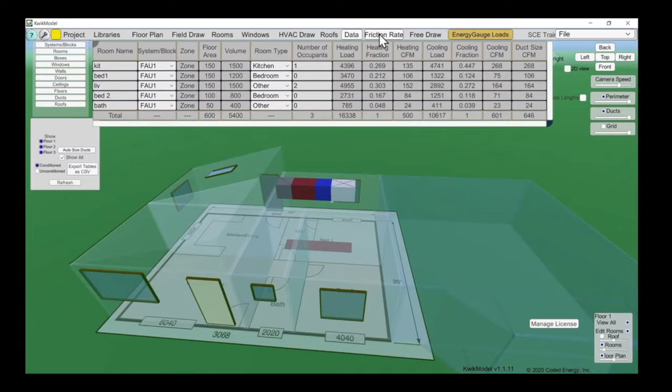All right, so in the step-by-step instructions, we're on step K, duct draw mode, and that's actually changed. That's now HVAC draw. I need to update those. So it's HVAC draw, and it says place at least one register in every room, and then place one return grill, and then draw the ducts, okay?

So we've already placed our furnace because we needed to do that in order to tell the software how many systems we have. So we've already got our furnace there, our air handler. So I'm going to scoot that over. Let's get it tucked up next to the attic access. I'm just looking straight down from above here. So here's our attic access. Let's say our,

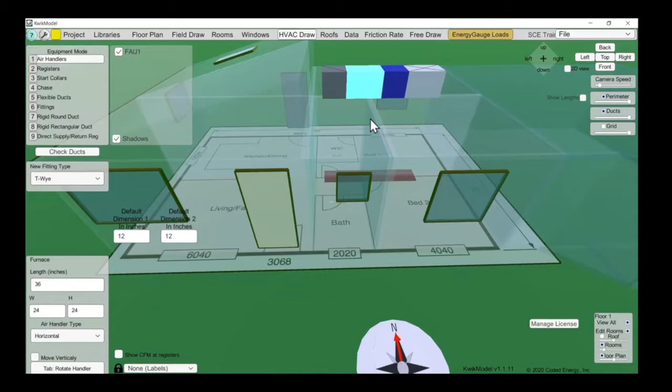I just noticed something. I drew these vaulted ceilings in here, just because I wanted to show them to you, and I left them in there, so now I got to deal with them. In the earlier example, I didn't have those, so I need to change something. So when your vaulted ceiling goes like this, your trusses are probably running left to right in this house. The roof trusses probably go up and then come down here. And so the space where I have to put this furnace probably runs front to back. So I need to rotate my furnace.

There we go. And I'm going to put it right here. This is way bigger than what the furnace would really be, but it's easier for you guys to see. Okay. So I'm going to rotate the furnace. You have to consider what kind of space you have up in the roof, where your attic access is. So there'll be a little access platform here. So the service tech can climb up the attic access, sit on this platform, and service the furnace. So the service side of the furnace will be facing this direction.

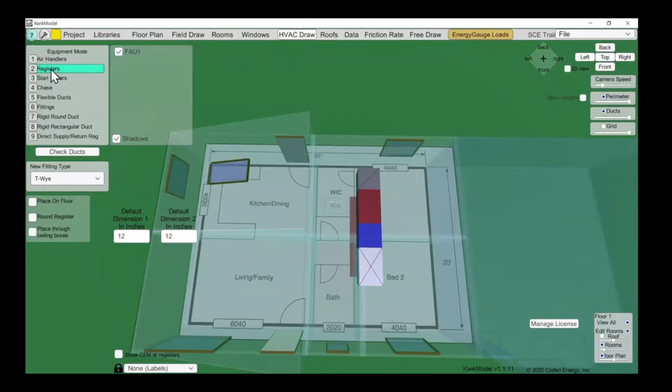We have this free draw thing here where you can draw shapes and stuff. So you could actually draw your furnace platform there if you wanted to. All right, but I got to put some registers in here. So click registers up here in equipment mode. And then similar to Windows, you just hold down the Alt key and then click where you want the register to go. By default, it will put in ceiling registers. If you want to put in floor registers, there's a button over here that says place on floor, okay?

And you can actually go underneath the house like this, flip the house and look at the house from underneath, and you place registers from underneath if you want to. So you can do floor registers or you can do ceiling registers. By default, it does ceiling registers. We'll look straight down from above. So there's a ceiling register. You can change those sizes. It defaults to 12 by 6 by 4 inches tall. Okay, you can change it down here.

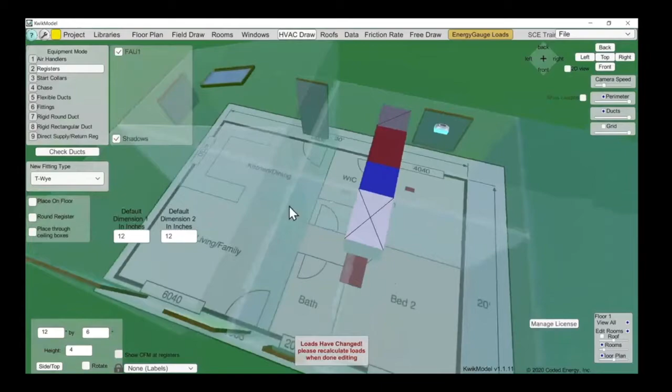And you can also do sidewall registers by just clicking on a wall. So in this vaulted ceiling, instead of putting registers in the ceiling, I'm going to put high sidewall registers in these knee walls. And I just hit Alt, click, and click. Okay. So see those registers are in the wall there. That's going to serve the kitchen and the living room. I put one in bed 1. I need to put one in bed 2. And I need to put one in the bathroom.

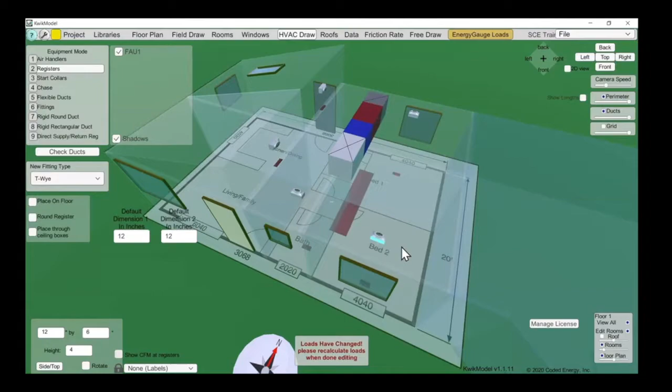Okay. Now, I have an article about register locations. It's kind of funny. One of the most contentious topics I've ever gotten into related to HVAC design was where in a room you should put a register. Some people will insist that the register needs to go over the window. And some people will insist that the register should go back inside the room, blowing across the room towards the window, okay? They all have advantages and disadvantages. Whichever one you do, you have to do it correctly. And by correctly, I mean you have to use the right kind of register, okay?

Generally speaking, interior to the room, blowing across the room is usually more energy efficient because it's gonna have shorter ducts, okay? The other thing that's very important, and I talk about this in the article on my blog and also in the book HVAC 1.0, is mixing. You want to make sure the room has good mixing.

My general rule of thumb for good mixing is to blow the air the opposite direction that it's going to go naturally. And by naturally, it means the air is going to want to go back to the return. So blow the air the opposite direction. So we've got this room with a door over here. And as the air comes in, it's going to want to go out the door to get back to the return. So blow it the opposite direction.

So being interior to the room, blowing across the room will encourage better mixing. The air will come across, it'll lose velocity, it'll settle, it'll mix, and then it'll be drawn out or pushed out the door, okay?

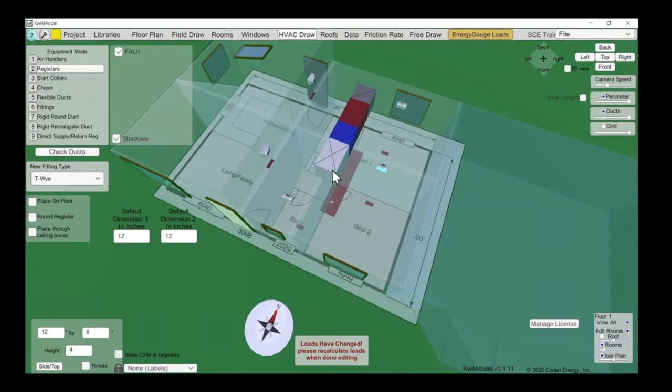As opposed to, if you were to put the register here and make this a two-way register, half of that air is going to go straight out the door, half the air is going to go to this side of the room, go around, and then come back out, and then you'll get a big stagnant area over here by the window. All right, so keep that kind of stuff in mind.

Again, this is more of an advanced topic, so just to keep things simple and keep them out of the way, I'm going to go against my own advice. I'm going to put them sort of out this way. By the way, in Las Vegas, they insist, or at least back when I was doing design, that the register be a square, four-way register centered on the room. That's how they do it in Las Vegas, or at least back in the day.

Okay, so I've got these high sidewall registers. I've got all the registers everywhere I need to go. 1, 2, 3, 4, 5. There's 5 rooms. Okay, the next thing to do is I need a return grill. So I'm going to put it in this little hallway here. So I'm just going to place a register. It's like a normal sidewall register.

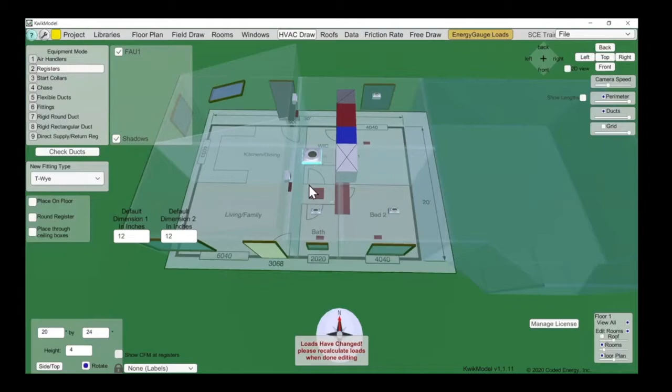And you can see the shadow is going to line up in the hallway there. I'm going to change the size just so that it looks like a return. Okay, give it a nice, good size. I'm going to rotate it there. So that's going to be a return. The whole thing about sizing registers and sizing grills, that's Manual T for terminal selection. Let's see. All right, so that looks pretty good.

Now I'm going to connect the supply registers to the supply side and the return registers to the return side. That's how the software knows the difference between a supply and return register or grill, is which side of the furnace or air handler it's attached to, okay?

So to attach a duct to a box, a plenum, we're going to use something called a start collar. They might be called something else in other parts of the state. But basically you cut a hole in the box and you attach a collar and you attach duct to it. We're gonna do a flex duct design, okay? You can do sheet metal, you can do rectangular. I have a whole video on our YouTube channel about how to do that, but I'm gonna keep it simple here.

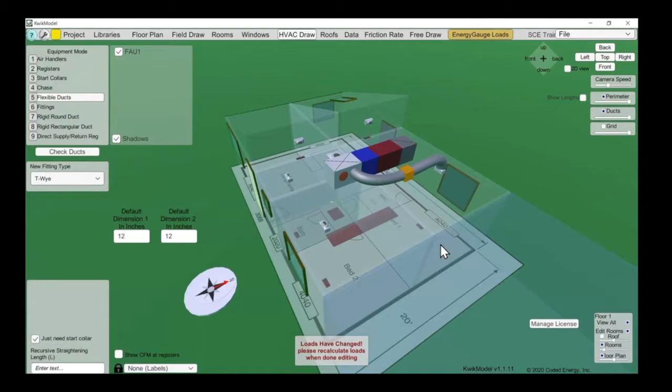And let's see, I'm gonna go to flex duct and you just highlight the start collar, highlight the register that you want it to go to, and you hit enter. And it draws a duct. Okay, we'll do that here. I need a couple start collars, so let's go back to start collars. Pull in there, flex duct, there, enter, there, enter. Okay, I've got all but one of them.

So I got this little bathroom here. And the question is, should I just run it straight off of here? Avoid the end of the plenum. Avoid attaching ducts out here on the end, because if you think about it, the air is screaming through this box into this other box, and all that air is kind of crashing into the end of this box. So the pressure hitting the end of this box is very high.

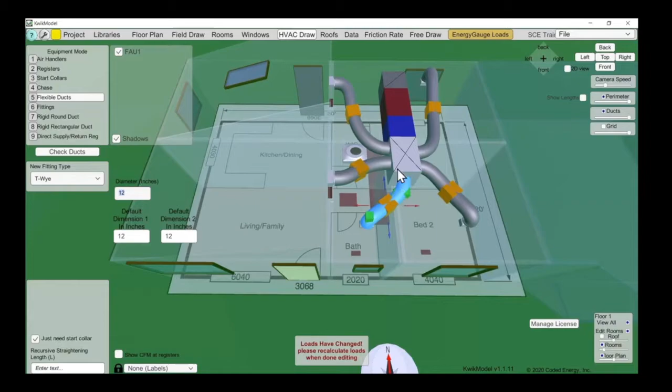So if you were to attach a duct to the end like this, that duct is going to get a lot more airflow than ducts coming off the side. So avoid that if you can, okay?

So there's a couple ways to do it. You could just run a little duct off the side here. We know that duct's going to be pretty small. And the ducts that I'm drawing now are just a default size, and you can change the default. At some point, we're going to lay out the ducts, and we're going to hit a button that says auto size duct, and it's going to size all the ducts based on the airflow, okay? But right now, we're just doing kind of a basic layout. These ducts are all bigger than they probably need to be at this point. So we could put a little start collar down here and we can attach the duct.

Dove is saying if you can show me how to put a T-Wye on a start collar if you have the time. A T-Wye straight off a start collar, or in the middle of a duct? Oh, NCI encourages one. Oh yeah, he says yeah. Okay. One trunk off the top and branches from that on NCI. Yep.

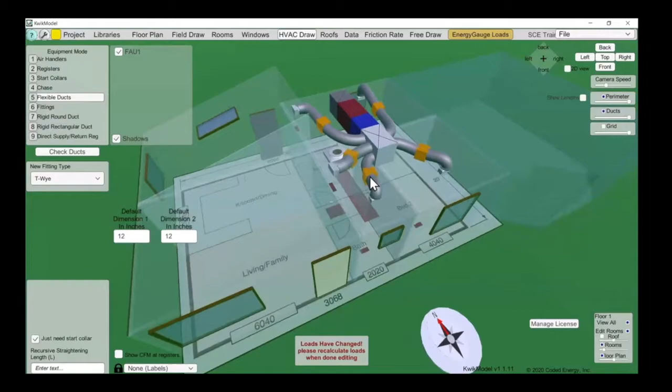Okay, so we could do it like this. But I want to show you a T-Wye. That would be very reasonable. It's a nice short run. That would make plenty of sense to do that. But I just want to show you what a T-Wye looks like. And so what I'm going to do instead is I'm going to branch off of this other duct here and run it over here. And to do that, you have to be in flex duct.

You highlight this handle here. By the way, you can move everything. See these colored arrows? If you want to move up, grab the up arrow. If you want to move left and right, grab a left and right arrow. These green boxes here change the angle of attack where the duct is coming into something. So if I want it to be sharper, I can bring it down. If I want it to be more gradual, I can bring it up like that. And there's also one hiding back in here. So you can really change the shapes of these ducts like that.

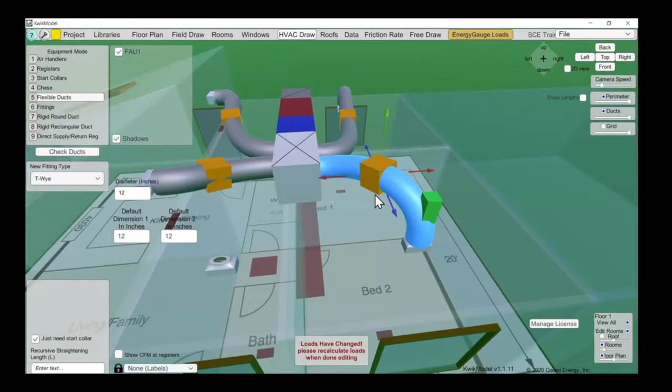All right, so to create a T-Wye, highlight that handle. Whatever's checked over here where it says new fitting type, it defaults to T-Wye. So when you highlight that handle and you hit enter, it's going to turn into whatever it says over here. Okay, so I hit enter, and now it's a little T-Wye. It's kind of big and bulky because that makes it easier to click. So flex duct, I'm going to highlight this connector point here, highlight the register, and hit enter, and there's your flex duct. So that's a little T-Wye right there. These handles go away if you click into a different mode, like Windows or something, so you can kind of look at it. All right, so that's our basic layout.

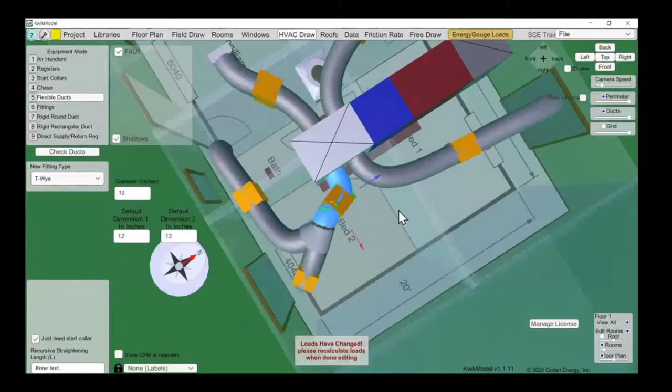There's kind of this little knob in here. We can fix that. I'm just straightening it out a little bit. There we go. That's better. Okay. Now let's do our return. So we got this great big return grill over here, and we need to attach a duct off the back and bring it over to that return. There's a couple ways we can do it. Now remember, we've got this attic access. So the service tech has to come up this attic access and get on top of here, and there's going to be a bunch of stuff in the way. So let's clean that up a little bit.

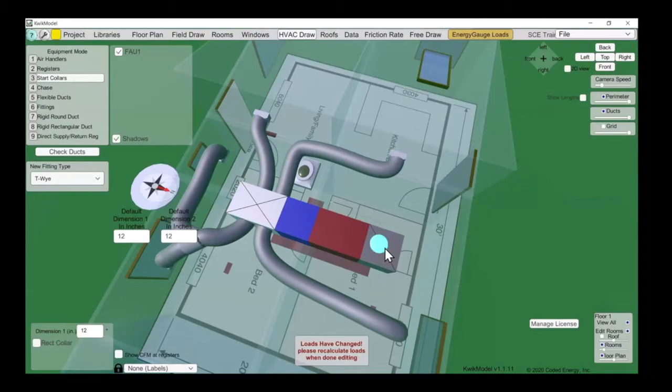So HVAC, draw flex duct. Let's move this duct kind of out of the way a little bit. Give the technician a little bit more room. Now notice this 90-degree elbow in here. We're going to have to account for that in a minute. I'll show you how we do that. And then we also have to get a return to get over here. So we want to keep this area clean for the technician to come in through that attic access. So I'm actually going to attach the return duct to the top of the plenum right there, instead of doing it on the end over here. So I'm going to attach a flex duct from there to there, hit enter, and there's a return.

Now, it's kind of taking the shortest path, and remember, we need to keep that area clean, so I'm going to clean it up a little bit. I'm going to raise this up out of the way, kind of get it up close to the roof. We don't want it to touch the roof. Bring this up, bring it over. Let's run it along the top of the furnace like that. Now we're keeping it out of the way, a little high. Let's bring it down.

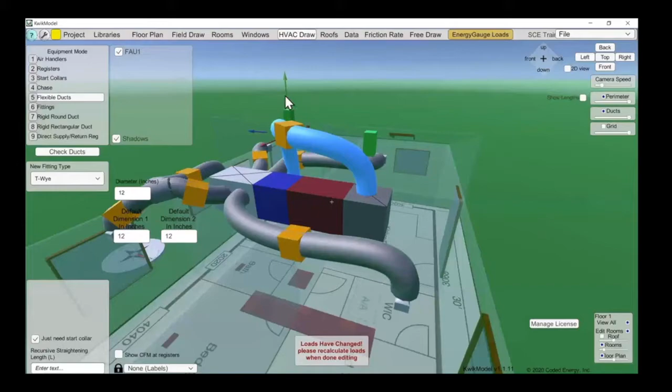It's a roof. Depends on where the peak of the roof is. The peak of the roof is up here coming down. We're going to need to bring this down quite a bit more. Okay. Anyways, you can play with that and kind of get it to look right.

Okay. And let's make that return a little bit bigger. Let's make it a 16. Be a little bit more realistic. Okay. All right. So we've drawn a duct system. Let me turn off the handles so we can look at it a little better.

We've taken a first crack at our duct system. You notice these overlap a little bit. I can clean that up if I want to. Let's go back, HVAC draw, move these out of the way so those two ducts aren't overlapping each other there. Clean it up just a little bit.

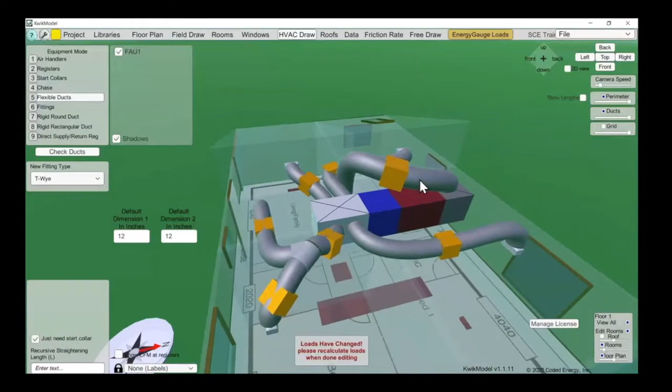And there's a lot of different kinds of fittings you can do and all kinds of other stuff. You can watch some of the videos and it'll go through splices and TYs and tri-Ys and pants-wyes and all different kinds of fittings. Let's show Dob what he wanted to see really quick. Oh yeah, a TY coming straight off. So how do I make a TY come right off of that?

So I go here, I go TY, then I go fittings, or do I just hit enter? No, you go to do a rigid round duct. Oh, that's right. So what you have to imagine, Dob, is that there's a 1-inch round duct attached there. Just make sure the right one's selected and press enter. Yep. And then you can drag it down. And then you just go to fittings. Someone was asking, what did you hit to convert it? Enter. Just enter. There you go.

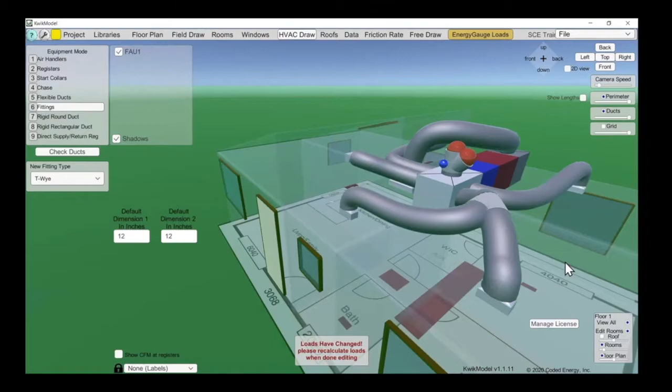So it's rigid round duct, but you're basically making it 1 inch long. And then you go back to flex ducts, and you can attach flex ducts to that TY coming off there. Okay. All right. So we got our basic layout. Now we're going to do friction rate. We'll go through our step-by-step instructions around the friction rate. Okay.

I don't have a good copy of the equivalent length table. Let me show you how easy it is to find stuff online when you need it like this. So I'm just going to go to Chrome, and I'm going to type in the search bar ACCA Manual D equivalent length. Enter. And then go into the images, and there you go. Look at all those. So let's look at this one here. So these are different fittings.

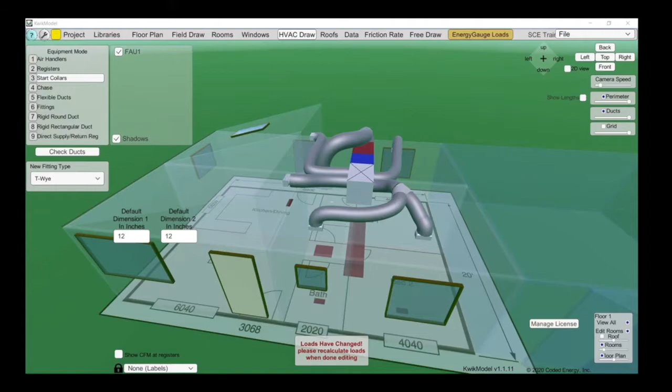How to determine friction rate for residential duct design. HVAC School, hey, that's a good website. It's in the way. HVAC School, by the way, put in a plug for those guys. Someone's saying they can't see it.

Yeah, my bad. And then Robert Rise was asking, why do a home run for the 2 sidewall registers instead of a TY? Because it's a really short run, and a start collar is cheaper than a TY. Plus, if you had a big duct going to a TY, that's another size duct you have to buy. So that might be a 10 going to two 8s. So then you have to buy a 10, you have to buy a TY. It's cheaper to buy 2 start collars and just have the 8-inch ducts come straight off. That comes from experience. And effective length is also part of it.

So if you look in Manual D, there's many pages of these equivalent lengths. What they've done is quantified the pressure drop through different fittings by equating it to a length of duct. So instead of saying this fitting has a static pressure drop of 0.057 inches of water column, they say this fitting is the same as 20 feet of straight duct. So they just equate it to straight duct.

And so if you look at all these interesting fittings, like this weird little side mount boot, this other kind of register boot, these different kinds of grilles, they all have these ELs, equivalent length 60, equivalent length 20. So the resistance to airflow through this fitting right here is essentially the same as the pressure drop of the air traveling 20 feet down a straight duct. That's why they call them equivalent lengths. It's a handy way to make everything speak the same language, and it makes the math a lot easier.

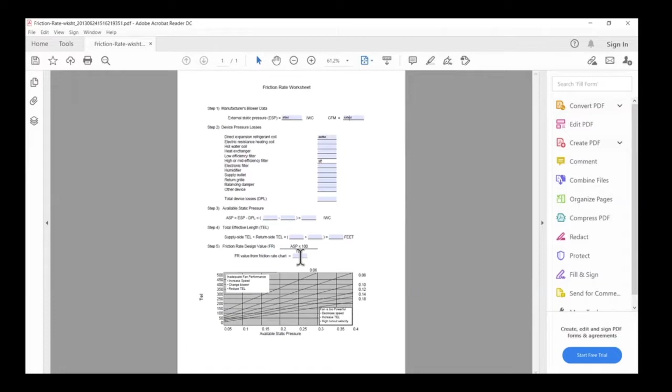And then Manual D, let me zoom in here. Manual D has these recommendations for a maximum and minimum friction rate. The minimum is 0.06, the maximum is 0.18, okay? And if you look right in the middle is 0.1. A lot of people say, oh, that's a rule of thumb or whatever. That's a good starting point. Okay, 0.1 is a good starting point, and sort of a target. If you know you're at 0.1, you're in between the Manual D maximum and minimum. So 0.1 is a good target to shoot for, but it just depends on your actual system.

How long are your ducts? How many fittings do you have? Because all those go into this equation, which is where this comes from.

That was asking, please zoom back a bit, or back in a bit. Zoom in? Yeah, please zoom back in a bit. Like that, or am I going the wrong way? Could you kindly repost the link to the PDF files? Yeah, is that under downloads?

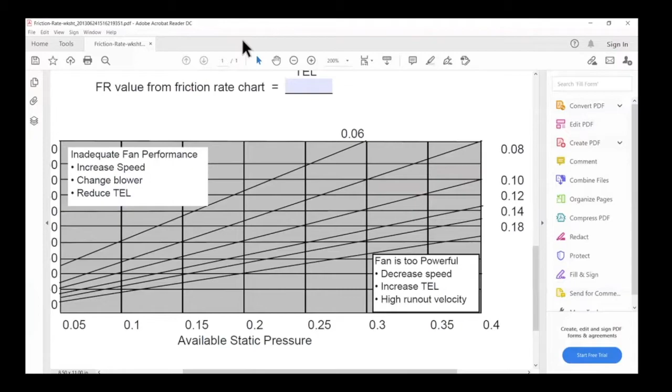This particular one, I just Googled ACCA Manual D friction rate worksheet, and this was one of the first ones that came up. There were tons of them. Okay, but here's the point: you don't need to do this. This is built into the software. This is built into KwikModel. I'm just kind of showing you, so when I start explaining KwikModel, I want you to realize that this is what's going on. Except what's not in KwikModel is this table here.

What about the PDF from last night? Which one? The floor plan? No, you had like a step by step or something like that.

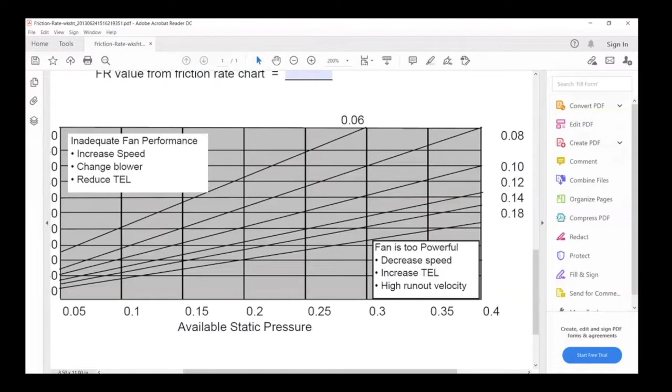Okay, go back. So that friction rate table I just showed you should look familiar, because here is step 1, step 2, and here's our available static pressure. Here's that equation, available static pressure times 100, and here is our friction rate. Now, 0.362 is really high. That's higher than the 0.18 we were shooting for, but we haven't done anything yet. Okay, so we have to put some numbers in here.

So here is our 0.5 and our 601. Remember that from our Manual S? This automatically is pulled from the Manual S, where we entered 601 CFM at a static pressure of 0.5. And that is, let me pull this down here where you can see it. Just kind of show you where that sort of thing comes from.

So here's that imaginary furnace. Here's the 0.5 inches of water column right there on high speed, and here's the CFM. Now this isn't the same furnace, but I'm just showing you where it's coming from. There's our 0.5, and imagine that right there said 601. Okay, it says 1200 for this particular furnace, but that's the numbers that we put into the Manual S.

Those numbers are being pulled back into the tables here, 0.5, 601. Okay, and basically what we're saying is we need to move 601. We have 0.5 external static pressure to work with. We need to size our ducts to ensure that when that furnace turns on, it's not working at a static pressure more than 0.5. Okay.

Open. Yeah, you already got that window open. That's what you just selected. It won't let me open my tray at the bottom. Don't maximize it. Okay. Oh, it's a screen share thing, I think. Yeah. I can't do it on this one because of the way I have it. Just press the Windows key and type in Chrome. Right here.

All right, so I just opened up a Chrome window, and I'm just going to type in Goodman furnace specs. Here's all different kinds of furnaces over here. Like here's one, Goodman brand furnaces. Go to their website. Again, I'm not promoting anybody, just the first thing that came to my mind. So let's go heating. Go furnaces. Actually, going through their website, it's easier to just find it direct.

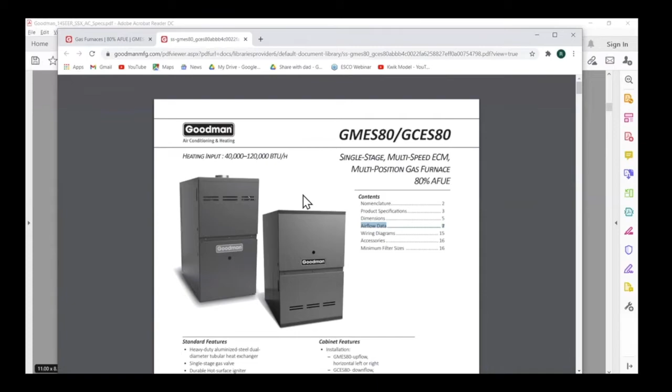There we go. So this is what you're looking for, something like this. It's a PDF file. Notice it's 16 pages, and right there, airflow data. That's what we're looking for. Every manufacturer shows it a little bit differently. One will have certain things down the row and certain things across a column, and another manufacturer will flip those, and another manufacturer will do it differently.

So let's go to page 7. Got all your dimensions and stuff. And CFM and temperature rise versus external static pressure. So here's our static pressure. There's the 0.5. Notice it's usually kind of in the middle. And then here's your different models down the sides. It shows your dip switches for your speed taps, and then here's your CFM. Their smallest furnace is this GMES80 0403A, probably 40,000 BTU.

At half-inch static pressure on high speed, it'll move 441. The next one up will move 458. The next one up will move 474. Oh, sorry, there's a speed tap. I'm doing it backwards. It's going low to high. High is down at the bottom. That's different. I'm used to seeing it the other way around. They don't show the speeds over here, they're showing the speed taps, but it should be obvious if I was paying attention.

High's down here. So 981 on high speed. I thought 441 was kind of low. So this furnace on high speed at a half-inch static pressure will move 981 CFM. At medium high speed, it'll be 759. So it's kind of bizarre they have it backwards like that. It's trying to be different.

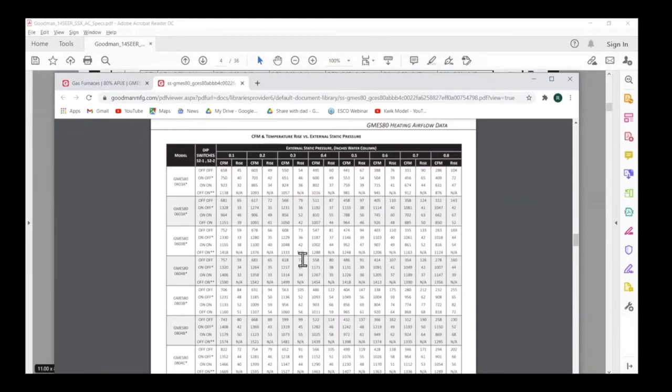I remember back in the day, we used to have a guy come by, and these were all printed hard copy, and they fit in a 3-ring binder. We had one for all of the 5 or 6 major manufacturers. And this thing was a beast. It was like a 6-inch thick 3-ring binder, with pages and pages of stuff. Now it's all online and it's all easy. You guys are so lucky. You're spoiled. All right.

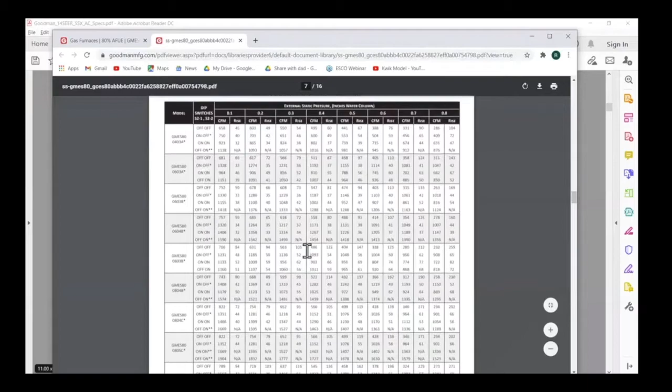So for those of you who stepped down and came back, I was just showing an example of a real furnace spec sheet. And they're so easy to find these days. You just Google them basically. All right, let's go back, open up.

Okay, so here's those two numbers, the external static pressure and our CFM, okay? And now we need to use those two numbers to calculate a friction rate, because a friction rate is how we're gonna size the ducts, okay? Airflow and friction rate and duct type give you duct size, okay?

We're doing flex duct. If you remember in the libraries, there was a duct types. We have vinyl flex, sheet metal, duct board, and duct liner. And this roughness factor affects the size of the duct. Notice that vinyl flex duct has a much higher roughness factor than sheet metal. That difference right there is usually represented in about 1 size difference of duct for round duct.

So in other words, an 8-inch sheet metal duct, in order to get the same amount of airflow, you're going to need a 9-inch vinyl flex, okay, because of this roughness factor. So we default to flex duct. If you're doing a sheet metal design, you're going to want to make sure that when you go to the data tables and your ducts, oh, right here, you're going to make sure you set these to sheet metal. Okay, they default to flex. Okay, I'm getting ahead of myself. So let's go back to friction rate.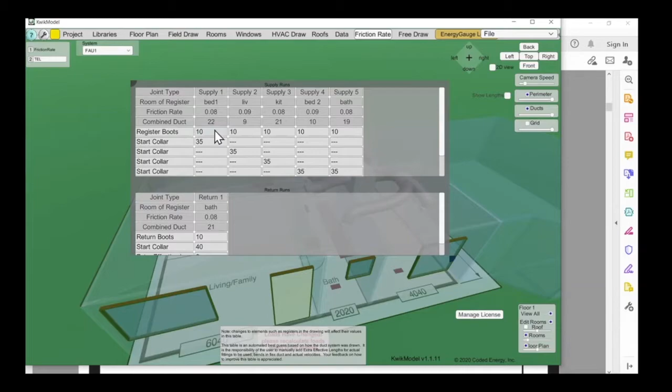And here are our 5 supply runs, and they're going to bedroom 1, living room, kitchen, blah, blah, blah. Okay, so there's our 5 runs, and it's showing the current friction rate for each run, and it's showing the combined actual duct length of each run. Okay, any trunks and branches. We know that everyone has a register boot because of the way we drew that.

Move this out of the way. So every run has a register boot. So that's 10 feet. You can edit these. If you're saying, no, it's a different kind of register boot that actually has 15, you can come in and edit these. This is just a first crack at it. The other thing it has is a start collar.

A round duct attached to a supply plenum like this has an equivalent length of 35 feet for the air having to make that bend. And so there it is, 35 feet. So each one has that. You can edit these, you can add to these. You can stretch it out.

Don't stress over these. These equivalent lengths aren't super accurate to begin with. Even the tables that you're looking at, they were done by University of Texas a long time ago in their lab somewhere. And don't stress over it, okay? Do your best, take some defensible numbers, just be able to say, yeah, I did this because I think this TY is one of these and it does this. Just think about it. Just be due diligence, go through, check it, okay?

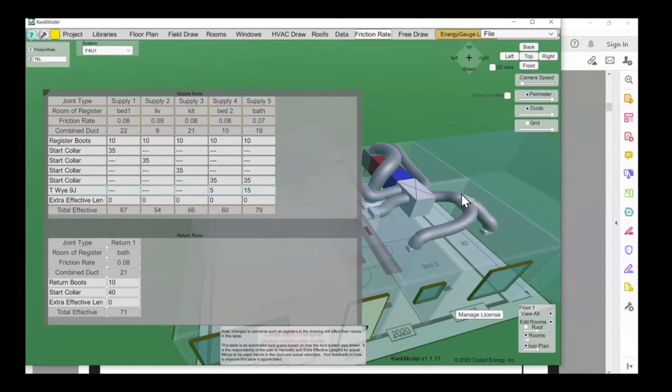And so it will do that automatically unless you tell it otherwise, and the fact that we're using software to do all this math for us makes it easy to do that, okay? So I'm gonna go back to the friction rate table. So the total equivalent length, you can look at each one individually by clicking on each individual run and then the returns. So remember the Manual D was suggesting between 0.06 and 0.18. I said, let's shoot for around 0.1.

I'll go back to this because we can see them all. 0.08, 0.09, 0.08, 0.08, 0.07. So we're okay. We're looking okay. This might change later on, but this looks pretty good. We're in the ballpark. We're not below 0.06. It'll actually give you a little error message if you're below 0.06 or above 0.18. But we're close to 0.1 on some of these. Okay, I think we're okay. This is a good place to sort of work from, and then we'll fine tune it later on.

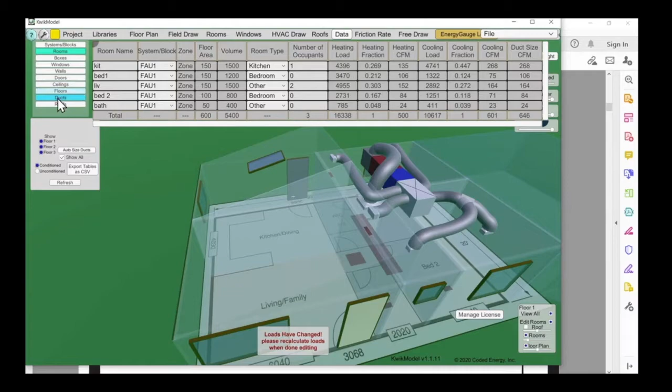All right, so we got our friction rate for each duct. Go back to the data table. Go into our rooms. Here's our airflows, heating airflow, cooling airflows. We've got our totals. They're being distributed accordingly. Now, let's go look at the duct table. In the data tab, the duct table, and here's our run. Let me scoot it down where we can see the whole thing. If you click on this, it will highlight the duct. If you click on the duct, it will highlight it in the table.

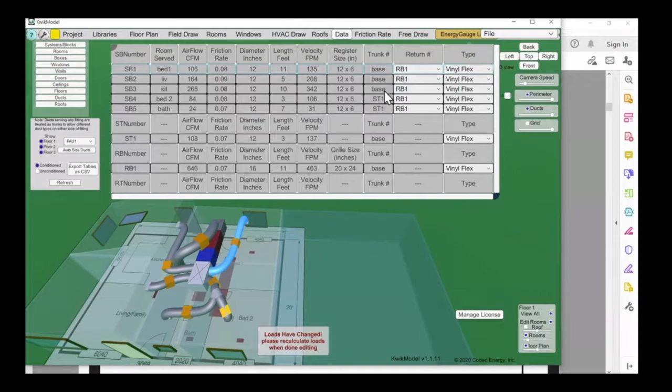All right, so let's look at SB1. Supply branch 1 is serving bed 1. It has a friction rate of 0.08. It's currently a 12-inch diameter duct because that's what the default was when I first drew it. It's 11 feet long. Currently, there's a velocity of 135. The register is 12 by 6. This is just informational. You can change this, but it won't change any of your calculations. And it's attached to the base. It comes straight off. There is no trunk serving it, okay? Let's look at this one, bed 2.

So this little run right here is called Supply Branch 4. It's serving bed 2. It has 84 CFM, friction rate's 0.08. It's only 3 feet long, and it is being served by a trunk called ST1, Supply Trunk 1. What is that? Well, here's this run. A trunk is a duct upstream that serves it. So that's going to be this duct up here.

So you see this ST1. Look over here. Here's our trunks. There's ST1. Highlight it. There it is. So this one is actually serving 2. So if we go back to the table, there's the 2 that it's serving. Okay.

So this trunk, the airflow in this trunk is 108. That should be the sum of these 2 branches that are being served by it. And if we look there, we got 84 plus 24 is 108. So those 2 branches are being served by that trunk, which means you add that airflow, and that's how much air is passing through that trunk.

There's only one return. It's getting all the air. And remember, it's 646. Why is it 646? Because remember, some of the heating CFMs were higher than the cooling CFMs, so we're designing it to 646. That might be a little safe, okay, on the return, but don't stress about it. Don't stress about it, okay?

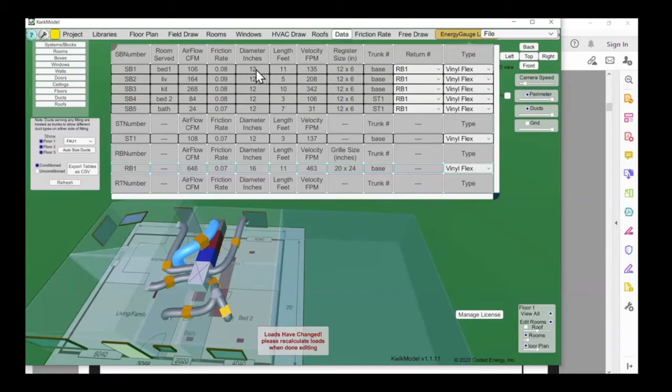Here's a magic little button over here that says auto size ducts. What it's going to do, it's going to look at this CFM, it's going to look at this friction rate, it's going to look at this type of duct, and it's going to size these ducts. So when you hit auto size duct, watch this column, watch these 12s will all change. 7, 8, 10, 6, 4.

Also look at the drawing. They all changed. They're all to scale. So that little 4-inch duct, look how skinny it looks. It's a pathetic little duct going out there. It's only moving 24 CFM. Okay. This one here is a 6-inch duct going to that bedroom. We got a 7-inch duct going back here. And we've got an 8-inch duct going to the living room. And we got a big old 10-inch duct going to the kitchen.

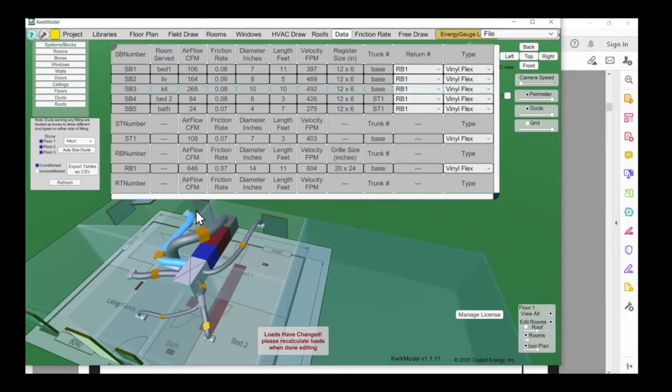Why is that kitchen duct so much bigger than the living room duct? They're the same size room. It's exactly the same size room. It doesn't look like it from the angle we're at, but it is. Why do you think this room needs so much more air than this room? I'll tell you why. It's got a skylight facing west. It's got a west-facing window. It's got a door on the back.

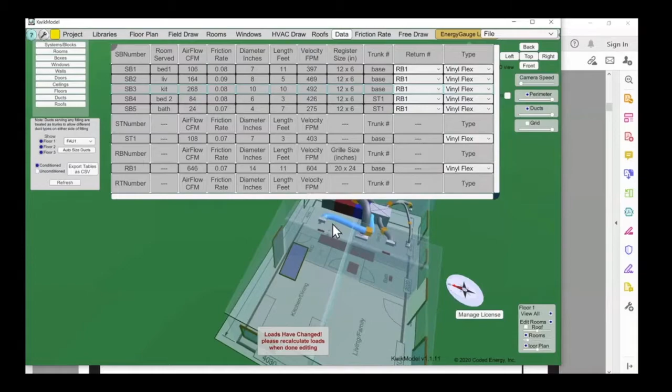The living room has a window and a door, but they're facing south. There's also 1,200 BTUs of internal gain in this kitchen. So that percent of airflow is much higher than it is for the living room. Therefore, it's getting a much bigger duct. If you don't like running a 10-inch duct to a single register, split it in two. Let's do that. We'll just split it in two.

So we'll come over here. It's going to get a little crowded over here. Go back to HVAC draw. So what I'm doing is I don't like a 10-inch duct going to a register. That's a pretty big duct going to a register. It's going to be a big funky looking register. So what I'm going to do, I'm going to split this into two.

So I'm going to go to air registers. I'm going to put another one here. I'm going to move this one over. I'm going to go to flex ducts. I'm going to turn this fitting here into a TY. I'm going to attach it.

Now, let's make it... Why didn't the friction rate change? Because the friction rate is based on available static pressure, all the pressure drops, and the total equivalent lengths. Those are what drive duct sizes. So the duct size changes because the friction rate is a certain number. So when the duct sizes change, the friction rate doesn't change. So those are sort of fixed based on other information, and they're being used to size the ducts. Okay, hopefully that makes sense.

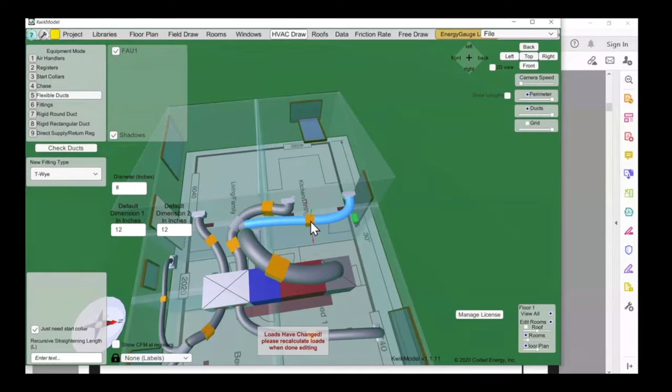So I'm going to go back to data tab. I'm going to go back to... you press return to add the T-Wye. Oh yeah. With the duct selected, whatever you have, you go to HVAC draw really quick. Yep. So HVAC draw.

You'll have this little drop down here, and when you have one of these handles... So you see these orange handles here? You highlight those, you click on those, and when you hit enter, it's going to change that orange handle to whatever is selected over here where it says new fitting type. And right now it defaults to T-Wye. Okay. I hope I don't mess things up too much here.

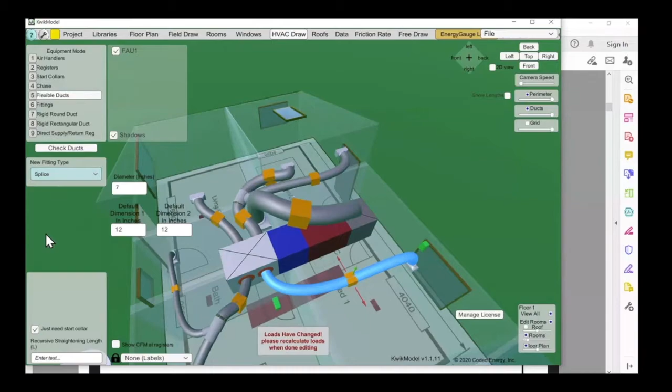I'm going to highlight this one. I'm going to pick something else. What should I pick? I like to pick splices. Okay. A splice is just two flex ducts connected end to end. So I'm going to turn this handle into a splice. So now splice is selected. This is highlighted. I'm going to hit enter. And now you see that little splice there? It put a splice there.

The reason I like to do that is because now it adds two more handles. So now there's a handle there that I can move around, and there's a handle there that I can move around. It gives me more flexibility to, if I need to, move a duct around. Okay. So that's a splice collar. If you want to move that splice collar, you got to click on fittings, highlight that splice collar, and then you can do all this kind of stuff. You can change the angle of it. Got a lot of cool stuff you can do.

If you're feeling brave, you can do a Control Z. Oh, yeah. So a lot of people like me, especially if you type a lot of documents, sort of live and die by Control Z. If you make a mistake, Control Z will undo it. That's a surprisingly difficult thing to program because in order to go back one step, you have to remember those steps. And so you have to keep this running log of things that you did.

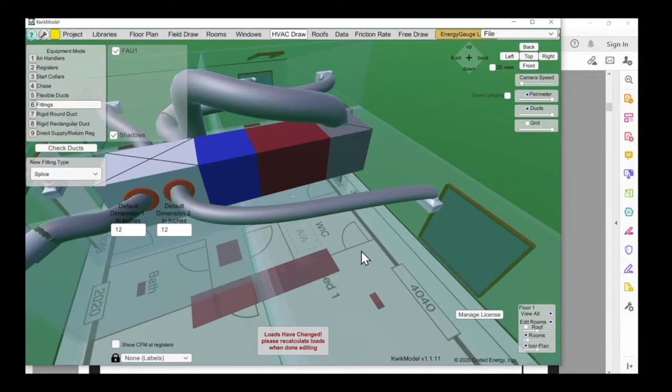So we do have Control Z in here, but it only works on a few things. One of the things it works on is placing something. And the other thing that it works on is if you just deleted something, it'll undo that delete. But if I were to move this and then hit Control Z, it won't move it back. We don't have that saved. If I were to delete something and hit Control Z, it will move it back. So what's happening? Oh, yep. So it took away that splice that I placed.

Okay. All right. So what did we do? We split this duct. We didn't like that 10-inch duct going in here to one register, so we split it. So there's 2 registers blowing into the kitchen. We need to go back to data. We need to go back to the duct table, which we're at. And so we need to auto size. There we go.

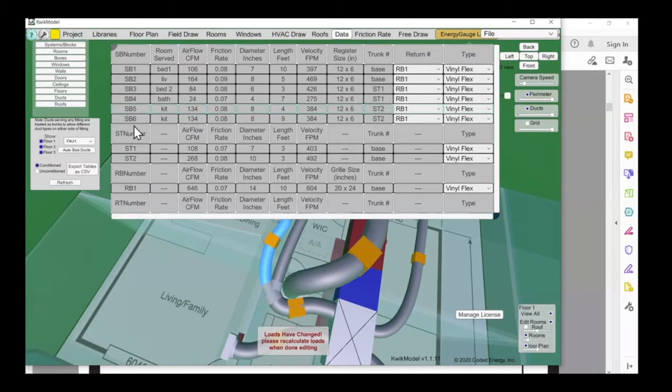So now this is a 10, and it's splitting into two 8s. Back there, you can see that. And this one is 8-inch, and this one is 8-inch. They're served by, now there's another trunk. We had ST1 before, now there's ST2. ST2 is down here, and it's a 10. Because remember, we had a 10 going through there, and we split that 10 into two 8s. And so that 10 should stay there as the trunk, and it does. So it's a 10 splitting into two 8s.

Okay. All right. We're getting close to quitting time. I promise not to run over like I did yesterday. So we basically have made the first pass through.

Okay. By the way, if you don't like odd size ducts, some people don't like odd size ducts like 5s, 7s, and 9s. Round up. Do not round down. Round up. The software will calculate odd size ducts up until 10, and then after 10, it's even sized ducts. That's how most well-stocked supply houses will have flex duct. Some parts of the country, some parts of California, in fact, they don't stock odd size ducts. They don't stock 5s, 7s, and 9s. So just round up to the next size.

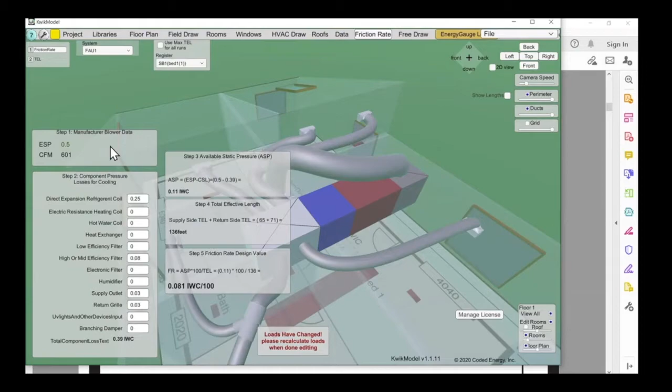Okay. All right. The other thing I wanted to show you was, remember I said don't stress about total equivalent lengths and some of this stuff over here and your friction rate. So if we were off on our total equivalent lengths, if instead of 5 or 10 feet on the register boot, it should have been 15 feet, and it changes the friction rate here by a little bit, is that going to suddenly make a giant duct up here?

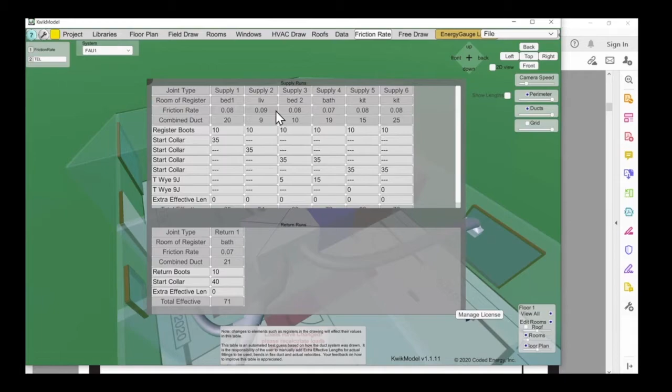And I just wanted to kind of give you guys a feel for how big of an impact friction rate has on duct size, okay? And the short answer is not that much, not that much. Going from 0.07 friction rate to 0.08, most of the time will not change the duct size, okay? So why stress about it? I don't know. It is an important number, and it's a number we need to calculate. It's a number we need to be able to defend, okay?

See, the problem is most HVAC design in California, or in most of this country, I would assume, does not go to this level of detail. It's designed by trial and error, or designed by rule of thumb. If you go to ask them, what friction rate did you use on your ducts? They say, I don't know, what's a friction rate? Or what total equivalent length did you use for that fitting? And I don't know. The fact that you've come in and quantified these and done a defensible calculation, you are so far ahead of the average HVAC designer. You're in good shape. Okay.

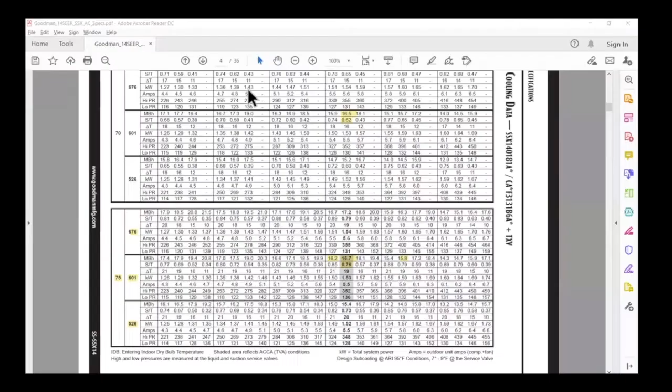All right. So what was I talking about? We got that. Let me go back to data. Oh, I wanted to show if these friction rates change, how much do they have to change before these duct sizes start changing? And the best way to do that is I put together this very colorful table here. And like a ductulator. It's from a ductulator. A ductulator is another way to look at that. In fact, that's an excellent point. I should make that before I go on.

If you've ever heard of a ductulator, it's a duct slide rule. The numbers on a duct slide rule, by the way, duct slide rules are for different kinds of ducts. Unless you have the nice one like the ACCA one, it has all the different duct types. So it's got a wheel for flex duct, it's got a wheel for sheet metal. But a lot of the simple slide ones, the little in and out slide rule ones, you have to look on there and it'll say whether it's for sheet metal or flex duct.

Okay, so you got your slide rule. You find your friction rate. You slide the little friction rate arrow over until it lines up with your CFM, and then you look in another little window and it's going to tell you a duct size. Okay, when you have that ductulator, slide the window that has the duct size in it, slide that until the next size duct comes up and watch where it moves along the friction rate. Okay, that's another way to kind of get an idea for this.

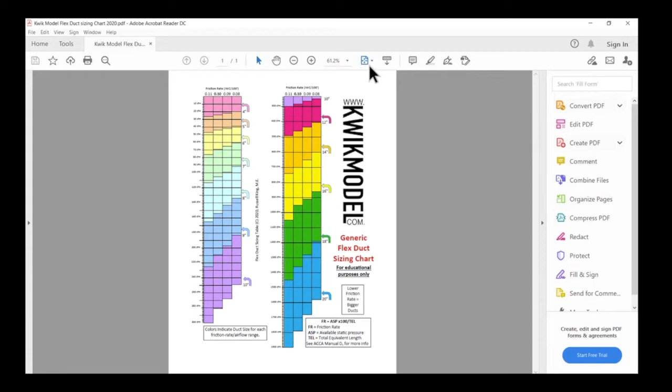And so what I want to show you here is from a friction rate of 0.11 through 0.1, 0.09, 0.08. So 0.11 down to 0.08. That's a pretty big drop in friction rate. 0.11 down to 0.08. Okay. What does it take to change the duct size? So now let me zoom in here. Oops. Zoom in a little bit more. So let's look at a very common sized duct. Let's look at an 8-inch duct. So this light blue color here is an 8, probably you can't see the top. Let's look at 6-inch ducts.

So at a friction rate of 0.11, a 6-inch duct will handle up to about 76 CFM at a friction rate of 0.1. At 77 CFM, you've got to put a 7-inch duct, okay? If you look here from a range of friction rate, 0.11 to 0.08, from a CFM of 47 up to 61, there's this band across here. From this line here to this line here, this thickness right here is a range of CFM where the duct size does not change from a friction rate of 0.11 down to 0.08.

So in other words, if 60 CFM is your target, you're going to be a 6-inch duct no matter what your friction rate is up here, 0.11 down to 0.08. It's at 60 CFM, it's pretty close here.

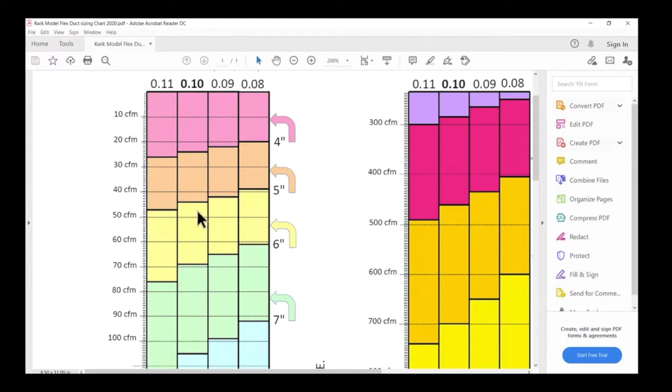So it looks like if you went to 0.07, that might change. If you can imagine, the next step down here might go below that. But if you're at, say, 50 CFM, you're going to be at a 6-inch duct no matter what. Okay. So there's these ranges here where it doesn't matter what your friction rate is. Anywhere between 0.08 to 0.11 is not going to change your duct size. So there's a lot of cushion, I guess, is what I'm saying.

Now, when you get into the bigger ducts, it's a little more exaggerated. But remember, on the bigger ducts, we're going in 2-inch increments. So we're going from 16 all the way up to 18, and from about 1,050 CFM all the way to about 1,190 CFM. So 1,050 to 1,190 is this range right here. Your duct size doesn't change. An 18-inch duct will work from a friction rate of 0.11 all the way down to 0.08.

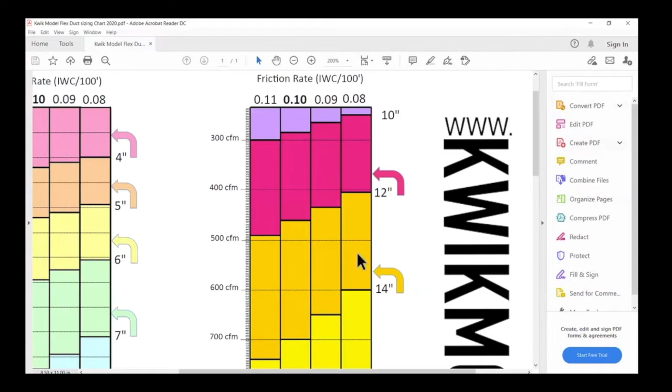Okay, so hopefully that illustrates what I was saying: don't stress on these little equivalent lengths. In order for the friction rate to change from 0.1 to 0.09, you've got to put in like 30 or 40 or 50 or 60 feet of equivalent length to change that. So the duct size is fairly immune to those little tiny changes, okay? Now, if you're right on the borderline, it might make a difference. But remember, there's some cushion in the rest of the duct system. And by that, I mean, you're always rounding up to the next size.

So let's say our friction rate is 0.08, because that's what some of ours were. And let's say we had to get 500 CFM through a trunk. So 0.08, 500, we're right here. That means we're going to use a 14-inch duct, okay? But that 14-inch duct will actually handle up to 600 CFM. So we have 100 CFM of cushion in that 14-inch duct because ducts only come in certain sizes.

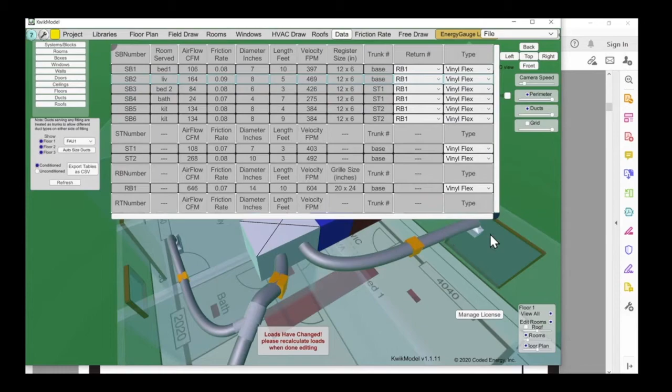All right. So guess what? We're basically done except to go back and fine-tune everything. Oh, and let me show you a couple other features really quick. Let's go to HVAC Draw. If you want to see the duct sizes on here, down here there's these labels, so you can put dimensions, and it'll show the duct sizes floating above each duct. That's kind of cool. If you want to see the airflow going through each duct, I thought it was going to be in the registers.

The airflow. There's a little checkbox at the bottom. Oh. Show CFM at registers. There we go. Let's do dimensions. Okay, there we go. That's good. So it's showing the duct size, 4-inch, and how much air is coming up the register. That's overlapping a little bit. Okay, there's a couple other things.

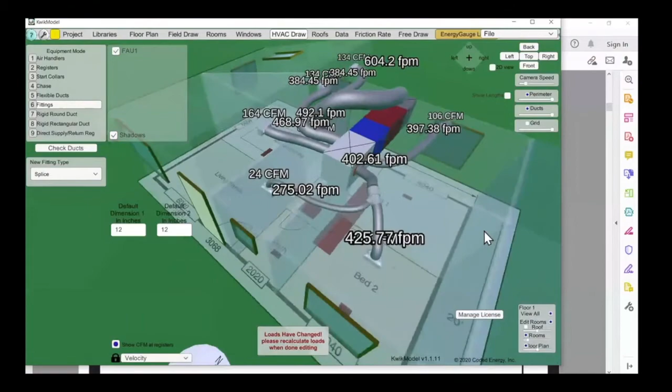We did talk about velocity. For some people, velocity is an important consideration. In my experience, I've not found it to be that big of a deal because most of my designs are in a dry climate. You do have to worry a little bit more about velocity in a more humid climate. Do keep that in mind. That's more of an advanced topic. All right, let's turn off all the decimal points on these. There's no reason to have 0.38 feet per minute, so we'll just clean that up a little bit. All right, so that's just a couple of little features.

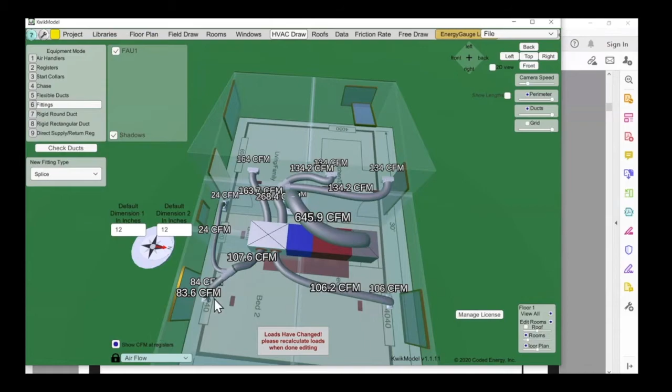The other thing, if you want to create a plan that looks more like a traditional 2D HVAC mechanical plan, one way to do that is to do it in 2D. So we go look at the top.

Okay, so I was talking about if you want to sort of create a plan to show somebody, what you do is you go view from top, 2D, and what it does, you look straight down and it flattens everything, so it looks more like a traditional duct drawing, if you will. I personally think it's very old-fashioned. What I would do if I was showing this to someone to install this. Let's say I designed this for my own house, and I said, "Here, install this."

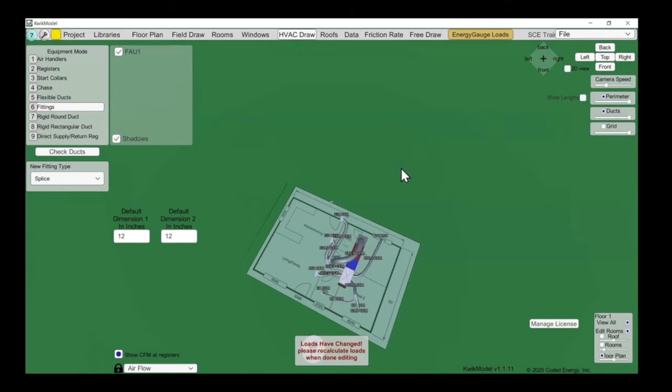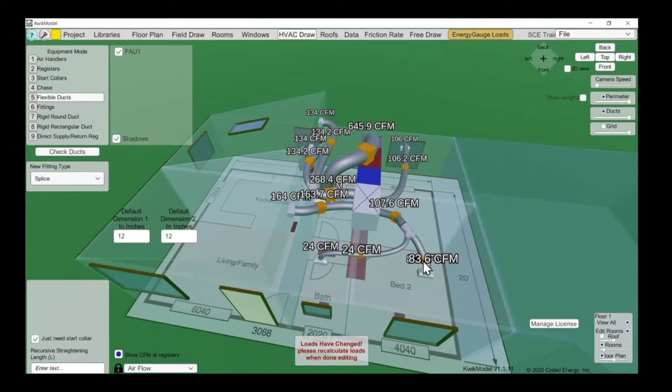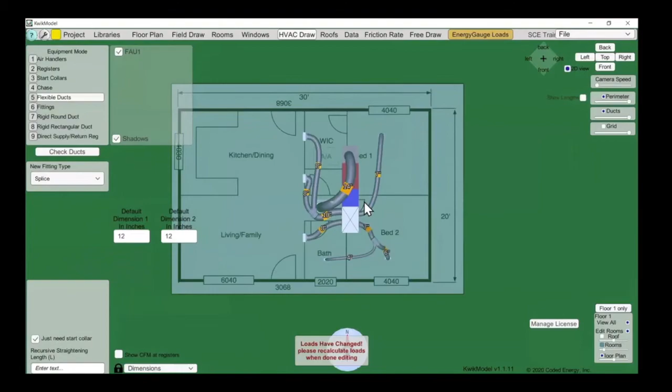But I think doing what we call isometrics in the plumbing world, isometric screenshots. Let me turn off those. That's part of it. You do isometric shots like that. So you look at it from different angles, take a shot, paste that into a document, look at it from this side, take a shot, paste it into a document, look at it from the front, look at it from the back. I think that, to me, for an installer up in an attic trying to run all these ducts, that's a lot easier to work with than, say, a traditional 2D drawing that's going to look something more like this.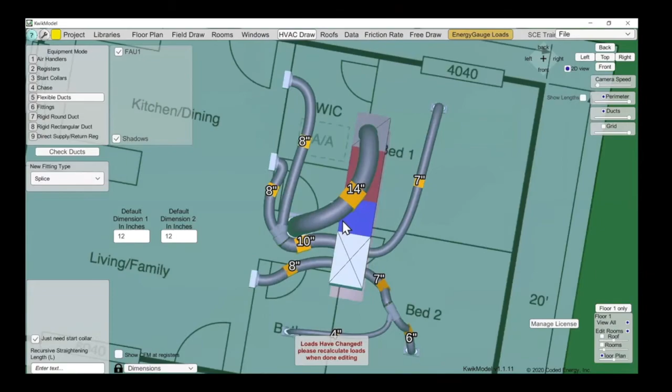If you're lucky. Most of them, the ducts aren't even to scale. Some of the duct drawings I've seen from other software is just a squiggly line. And they're all the same dimension, they're all the same thickness. You can't do it so that it's to scale and stuff like that. I've also seen single line drawings. I've seen some really, really beautiful CAD drawings of a duct layout like this, but they were single line drawings. The ducts weren't even to scale. And flex duct curves. This is much more realistic of a flex duct situation, and gives them a much better visual representation of what the system is going to look like once it's actually installed.

Okay. The other thing too, I didn't mention, if you look at it from the front, turn the rooms back on. Another reason that it might be worthwhile to draw a roof on top of this is it tells you how much room you have for your ducts. If you look here, and if you were to draw a line from this point down to here, if that was the roof line, it's actually a little bit higher than that. This duct might be hitting the roof. So you want to come back and say, all right, that's not in a good spot. Let's move this guy down, scooch him down, get him out of the way, like so. And now he's clearing the roof better. Okay, so that's a pretty cool little roof.

All right, I've got a couple minutes left. I'm going to open up.

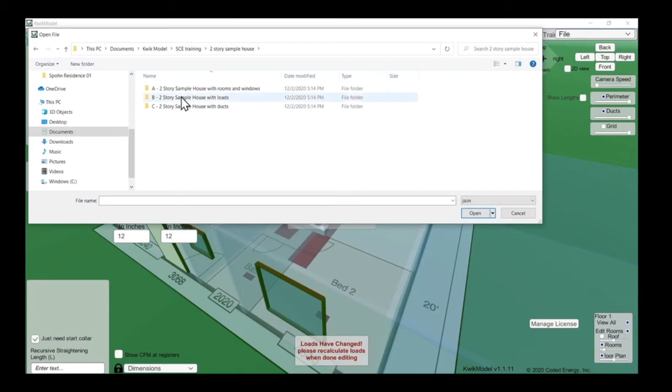I want to show you a couple of projects that are done. All right. So this is a two-story house that I did a while ago. And I'm going to turn off... So remember, in two-story houses, you got two floor plans. So there's a lower first floor.

Remember over here in elevations, floor plan, elevations, we have this little guy here, and we had to add a floor. This is what happens when you do that. It creates like another floor level. It gives you another level to import a floor plan to. You've got to get those floor plans to line up, and then you have to put your rooms on there.

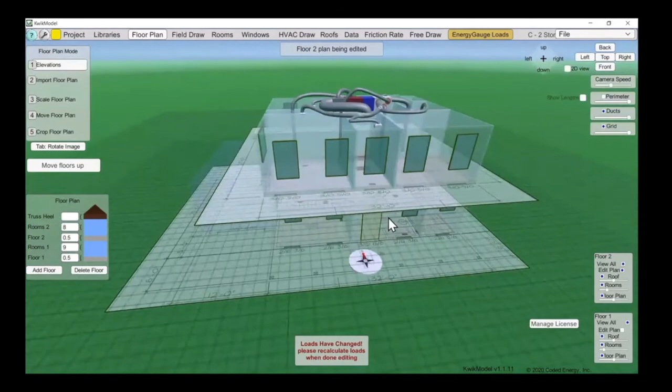And so I'm going to turn some of this stuff off so that it looks a little more normal. Not the rooms, the floor plan. We'll turn off the grid. Okay, and so now there's a two-story house. Let me darken the rooms a little bit. A little ghosty. There's a two-story house with a single unit.

And you might be thinking, whoa, that's pretty ugly. Sorry, folks, that's reality. That is 10 pounds of spaghetti in a 5-pound sack. And that's what a real flex duct system looks like up in an attic. They're not straight lines, okay?

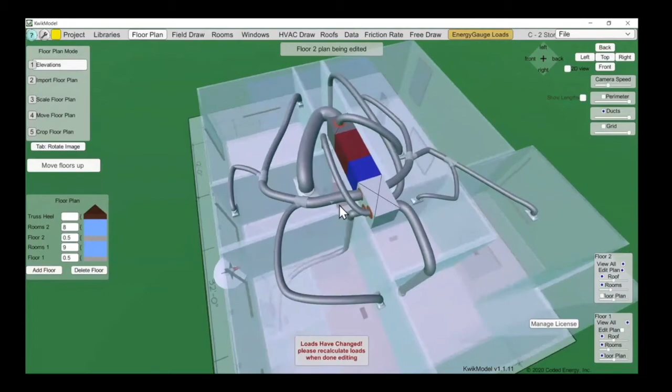And if you get stuff like this, you may want to be careful not to draw it this way, because they might say, oh, that's how I'm supposed to install it, with this elbow in here. But put in the notes to install the ducts as straight as you can. This little guy here, that shouldn't be there. Let me fix that real quick. I'm just going to take that ugly bend out of there.

So, looks a little better. Okay. But if you have to do that, you have to bend this around. That's an equivalent length that you can factor in. Okay. Also, the other thing, how do you get to the first floor from an attic? Your furnace is in the attic. You've got to get down to the first floor.

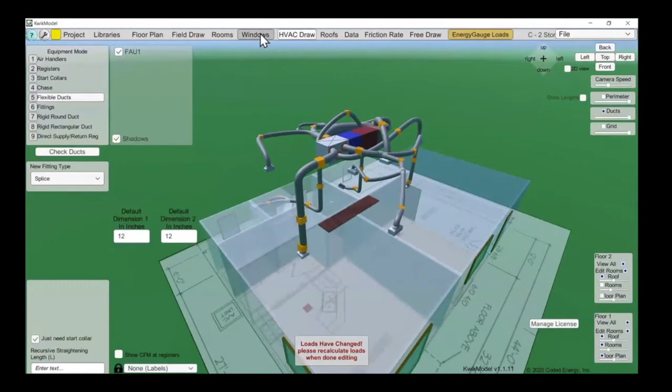Let me turn off the second floor rooms. Look at that beast. The first floor has registers. How do you get down to those registers? This was one of the most challenging parts of HVAC design, with a two-story house with a furnace in the attic and getting the ducts down to the first floor.

Someone's asking how the chase function works. Yes, chase function. So a chase is a vertical void in the walls that allows you to run a duct from the attic down to the first floor. So let me turn the rooms back on here real quick. I'm almost out of time. Okay.

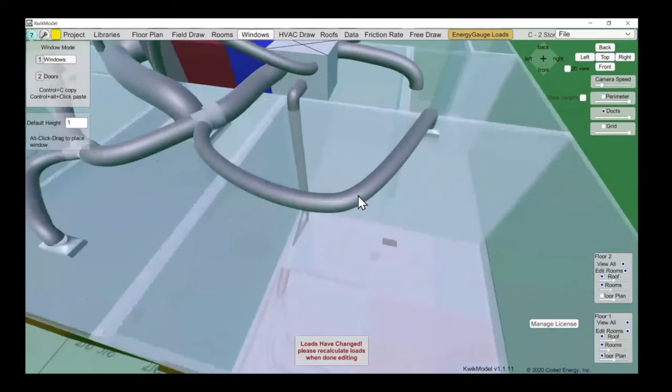So the chase is, if I go into chase, you see that highlighted blue duct right there? That's a chase. So it's actually a vertical duct, okay? But we call it a chase because it's inside of a chase. It's inside of a boxed out corner. If we look down at the floor plan here, you see down on the floor, they've boxed out this corner. So this boxed out corner, that's the actual chase itself, is the box. But we say we want to run a duct through that chase.

And so we have this, it's basically like a fitting. Okay, let me see if I can place one here. If I just do Alt-click. See, I just placed one there. I'm going to line it up with that chase. Now I can attach a duct to the top and attach a duct to the bottom. We call that a chase. It's just a vertical duct, and it's treated like a fitting.

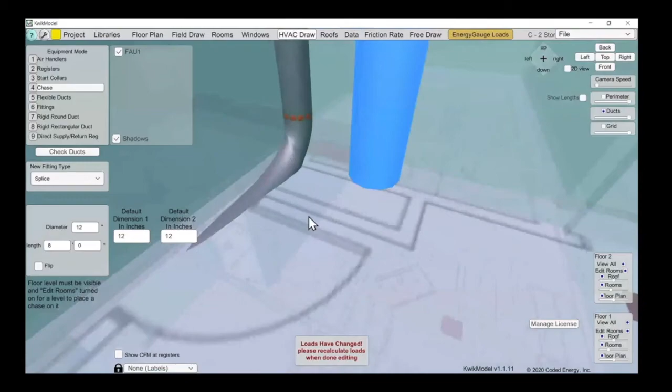Okay. And then when we get down, the floor joists are going to have some thickness to them. And lighten the room up. See if it's a little better. Okay, so basically what's happening is this duct is coming down until it hits the floor joist. It's running through the floor joist, and then it's dropping down into a dropped ceiling.

A dropped ceiling is when you take the ceiling of a room, so you got this little bathroom here, and we've lowered that ceiling by 12 inches. That's a feature in the software called a drop ceiling, and it's in the rooms, and you can tell it how far to drop down a ceiling.

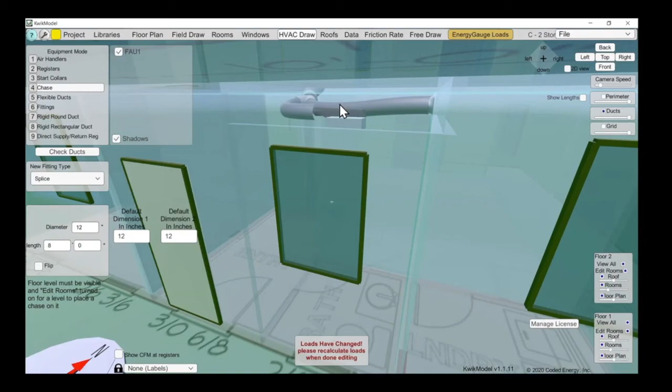But what this is, is like a fake ceiling. They'll lower the ceiling by 12 inches, they'll sheetrock it, and they'll run ducts through there so they can go perpendicular to the floor joists, because the floor joists are running front to back. So you really got to get good at reading structural plans.

One of the mechanical engineering departments that I ran was actually owned by a big structural engineering firm. And that was cool because I could communicate directly with the engineer who was designing these floor joists and say, hey, I really would like the floor joist to go the other direction. And they'd say, well, we can make that happen in certain parts of the house. So they were able to accommodate some of the stuff for me. But most of the time you don't have that luxury, and you've got to deal with what they give you.

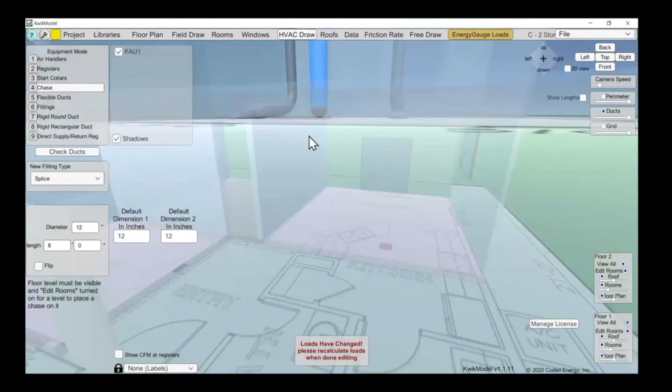If you don't design this house in advance, if you go out to the house without talking to the framer or anybody in advance and try to install ducts, you're gonna have a horrible, horrible time. They're not gonna give you room to run your ducts. So you need to do your duct design in advance, send it to them and say, please leave this floor joist bay open for me. Please don't run your plumbing through here. I mean, sometimes it's a struggle, but the whole point is design it first.

I missed a question from before. Doug was asking, what do you do to make sure your floor plan's aligned? Oh, look at the rooms. So when you place your rooms, I'm going to turn off the second floor. You place your first floor rooms on the first floor, and then place your second floor rooms on the second floor, and then just make sure those corners line up. We also have little markers on, if you go to floor plan mode.

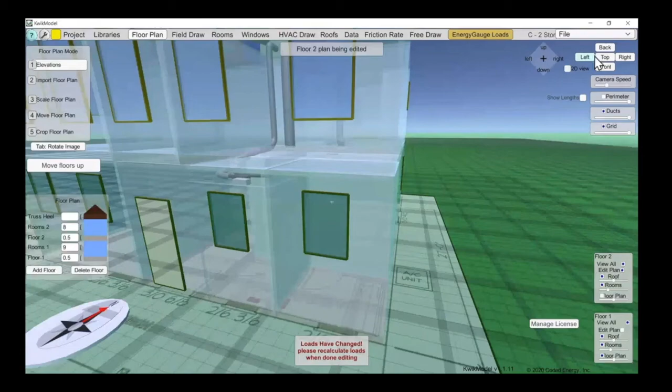Yeah, that's a good point too. There's these brown circles that you can click on. Show the floor plans and hide the rooms, and then it's that brown circle there. That'll be the same on both floors. So just do a scale floor plan. One thing that will always line up between the first floor and second floor plans is going to be the stairs. So always use the stairs as a reference to line stuff up. Also, any exterior corners. Go into 2D mode with the grid. That helps too.

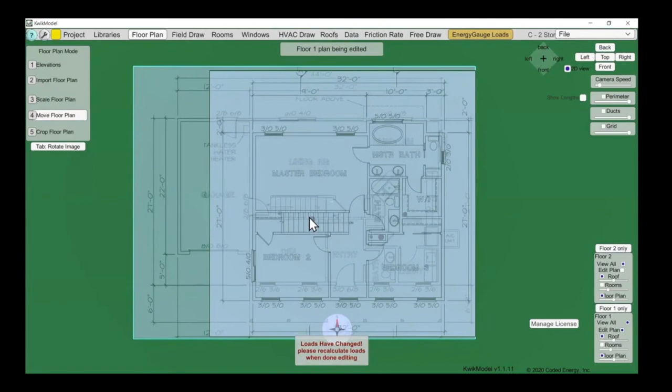And see if I move the floor plan. I think I got something turned off. But this black dot here. You need edit plan, the bottom one. So you can move stuff around until you get them to line up, and use these scale marks. And then the brown dot, you can drag that around. This brown dot here will be the same on the first floor and second floor. It's like an alignment point. Scale is where you move all of the rulers and stuff.

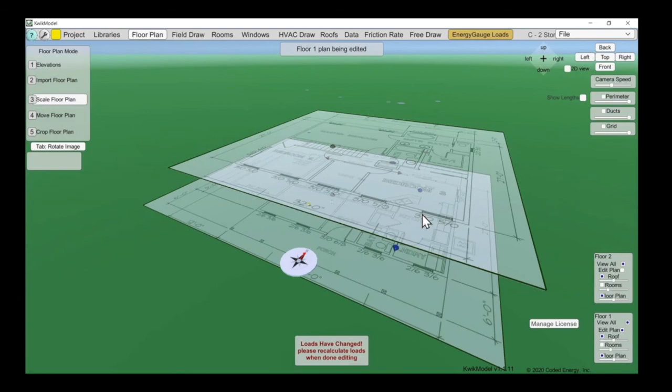Whatever software you guys use, whether it's Elite or Wrightsoft or KwikModel, you're doing good. You're doing a good design. You're way ahead of the average contractor. And we encourage you to do that. There's a lot of classes. There's a lot of good stuff online.

And my personal goal is to make HVAC design standard practice for everybody. And I hope we do that by having a simpler software, a 3D software, but also by introducing other people to it, like energy consultants, architects, HVAC contractors. A lot of them aren't even computer savvy. So get other people that they can go to and have them do a quick design for them, cheaply, simply, so that it becomes much more standard practice. So that's what I'm hoping to do. And if it takes teaching everybody individually, then